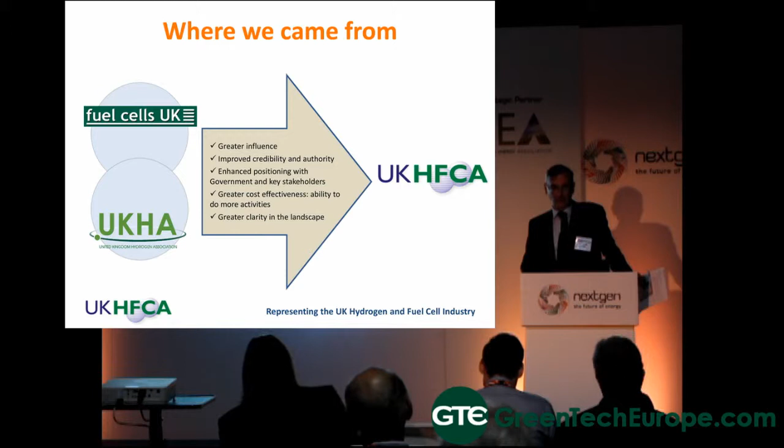There's been more promotion, like presentations at Portcullis House last year, and a number of ongoing events, giving greater clarity for the UK industry on where the vision was going for the business. The membership is made up of a cross-section of academics, gas suppliers, technology providers, and technology developers. Effectively, it's a who's who of the industry at the moment in the UK.

So the positioning really, the aim is to accelerate the commercialization of fuel cells and hydrogen energy in the UK.

The association provides an authoritative viewpoint, commenting on potential new legislation, energy market reform, and various other government initiatives, and provides a viewpoint on research development priorities while the market is still in a transition phase, for government and other funding agencies such as the Technology Strategy Board.

The areas covered are all fuel cell types and applications, covering the complete fuel cell chain from research through material science to integration and distribution. It also covers hydrogen production and storage, infrastructure, and other issues around the delivery, storage and use of associated fuels.

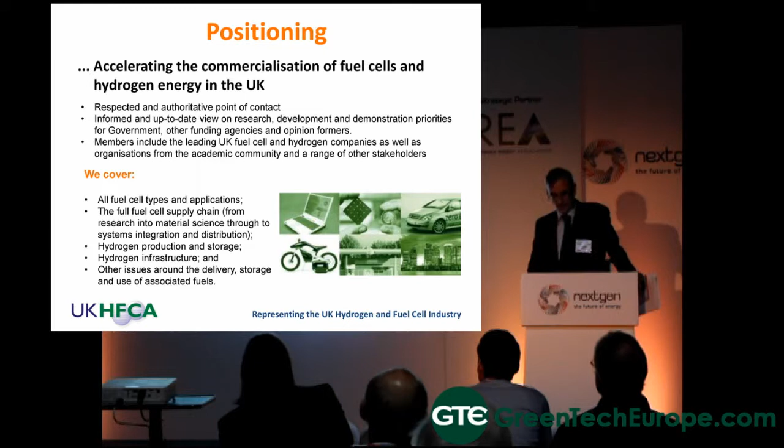So why fuel cells? Dan's given some of the background on where things are going, but in terms of fuel cells, they really provide a key opportunity to decarbonise a large range of applications. We've talked about power and heat applications, transport applications, and portable ones. Essentially, they're units which are safe, very efficient, and clean, with very little in terms of emissions. Reliability is now being demonstrated with long running times, and availability is increasing all the time, and they're becoming far more cost competitive.

So we're definitely in that transition where we've seen funded projects moving through to actually being commercially competitive. And they can operate on a range of fuels as well as hydrogen - there are cells working on natural gas, methanol, ethanol, methane and other gases.

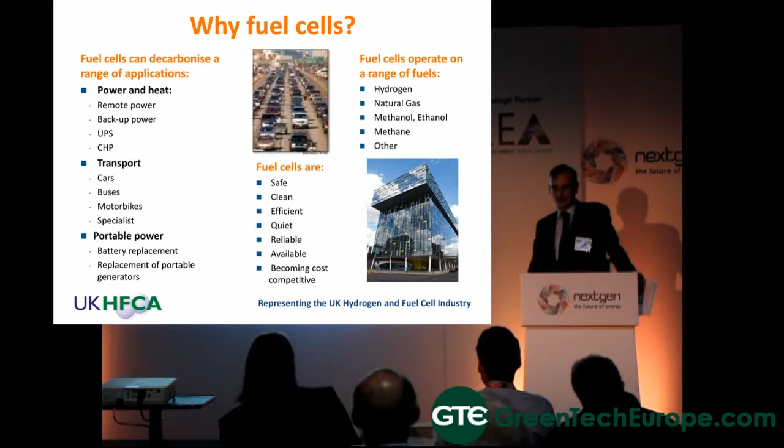So why do people look to use hydrogen? Hydrogen itself can offer a zero carbon footprint depending on the method of production. I'll talk a little about what the differences are, because people do talk about the source of hydrogen and its importance, and I'll show the impacts of where that can be. There's a variety of methods.

Currently the largest amounts of hydrogen are produced by steam methane reforming, mainly for diesel production, but there's a lot of clean electrolysis-based technologies, and we'll see more of that in some of the later presentations. Hydrogen can also be available as a byproduct stream - one of the production sources in the UK at the moment comes from a byproduct of chlorine production.

The product itself is safe to produce, store and transport. To give you an idea, Air Liquide operates a network of around 900 kilometres of pipework in Northern Europe, transporting hydrogen all the way from Rotterdam down to the French border, with systems built up over nearly 40 years with an exemplary safety track record. Something that's perhaps not really understood is how commonly it's applied in industry.

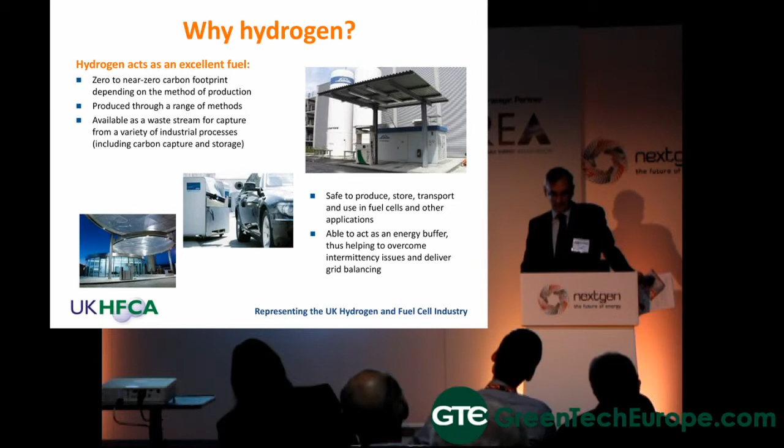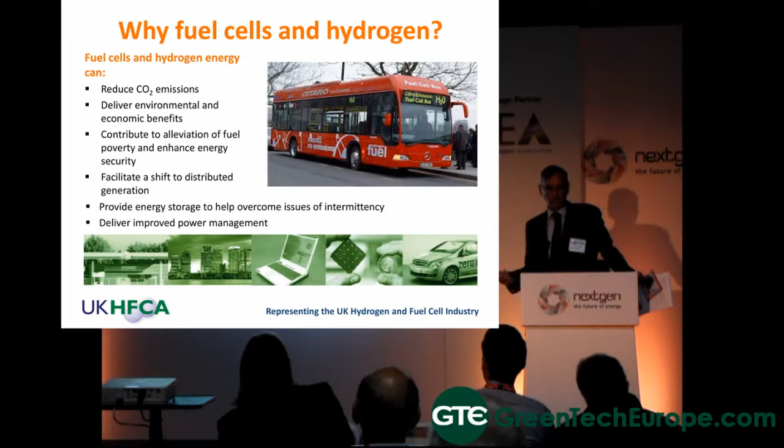Critically, as you'll see, particularly I think Graham will talk about, it provides an excellent energy buffer, an opportunity to overcome intermittency and deliver grid balancing. Combining hydrogen and fuel cells, you can reduce CO2 emissions. There are a number of benefits in terms of alleviation of fuel poverty and environmental benefits we've talked about.

Moving forward to some of the questions people ask, like where does the hydrogen come from. Even if we take hydrogen from existing industrial sources, which is just our starting point and not where we'd want to go - if you look at a petrol engine, you might see around 160-180 grams per kilometre in total from fuel production and vehicle emissions. For hydrogen from a fuel cell, there are zero emissions at the tailpipe, and if it came from a carbon source, there might be about 90 grams per kilometre. So already you're showing significant benefit from where you are now.

The vision is that those sources which currently use carbon would become decarbonised, and there will be other sources coming which have zero footprint. So essentially you start from an improved position, with the view to head in an ever-improving direction.

Same goes for mobile applications. If you use a genset working off petrol or diesel, you can emit around 37 tonnes per annum in CO2 emissions. You're at 2.8 if you use hydrogen from existing sources, and if you take it from improved sources, you will eliminate that altogether.

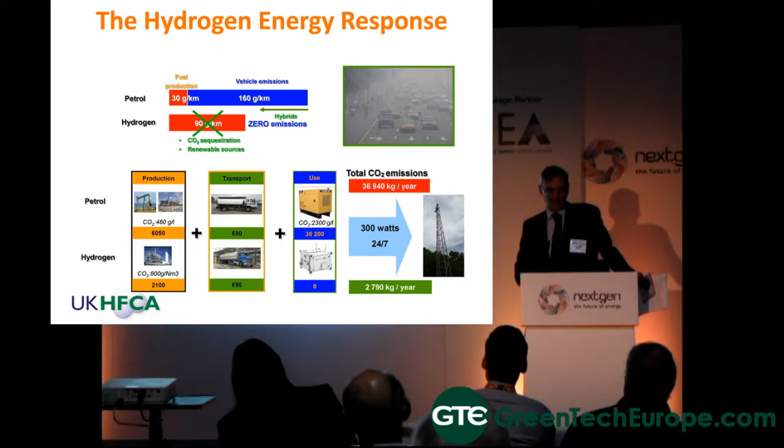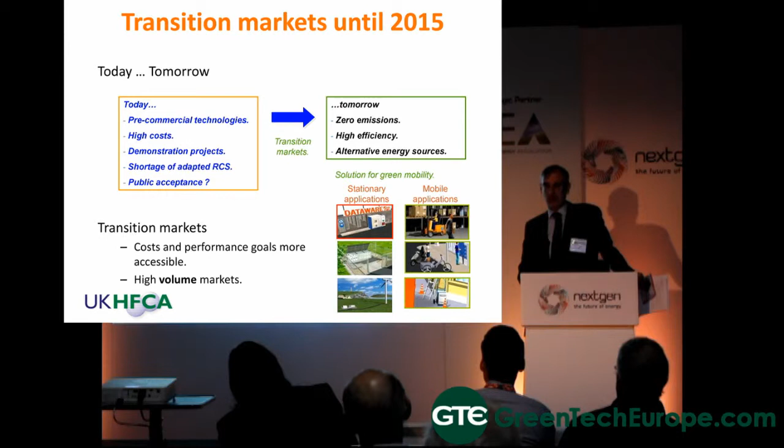We've gone from pre-commercial technologies that were high cost with demonstration projects, to production facilities becoming more fully loaded, and we're transiting to a situation where the economies of scale are improving. We're moving forward to applications being applied in the field now, offering zero emissions, high efficiency, and a real alternative with stationary applications such as data-aware backup, grid balancing potentially, mobile applications, forklift trucks, transport and road signage applications.

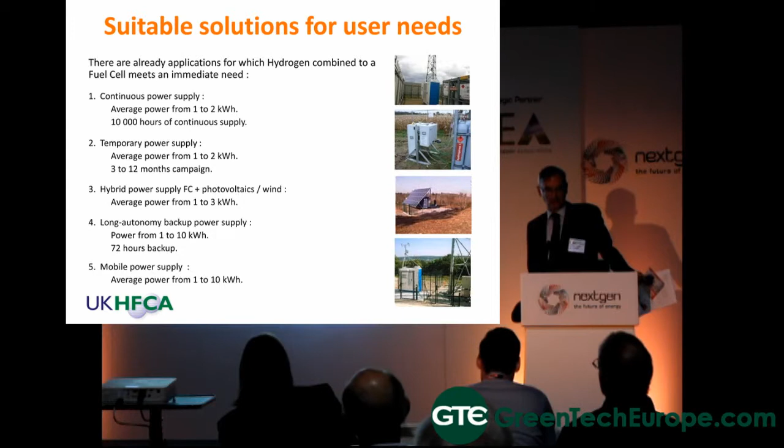These are areas where units are now running, operating on effectively a commercial basis, where you have continuous units from 1 to 2 kilowatts offering 10,000 hours of continuous supply, temporary power supply units from 1 to 2 on 3 to 12 month campaigns, hybrid applications with 1 to 3, and some long-term mobile ones in the 1 to 10 kilowatt area.

Clearly going forward there's a key opportunity to decarbonise transport. Fuel cell electric vehicles are a key part of the potential mix going forwards. As we've indicated, even with current fossil fuels there's a significant saving, and moving forwards that would move to zero emissions.

Talking about where we can go, we can look at electrolysis of water using electricity generated by wind, nuclear or other green technologies, biomass gasification technologies, and also capture and storage of carbon dioxide from existing steam methane reformers. Our company is proposing a project in Rotterdam which will capture the CO2 from a methane reformer and store it in the North Sea.

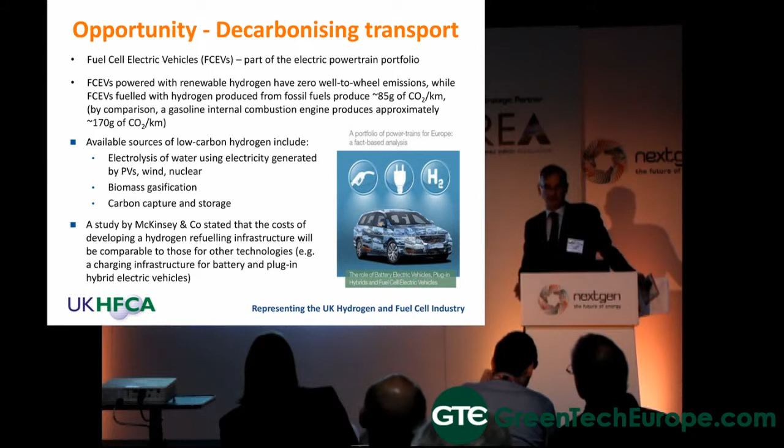Studies by McKinsey have stated that the cost of developing a hydrogen refuelling infrastructure will be comparable with other technologies. What's needed to move that forward is a vision, and that's where UK Hydrogen Mobility comes in. This has been launched by the Department of Business Innovation and Skills. It's a programme to bring together industry and government with a number of bodies, with investment to support and drive that forward - a cross-body drive to create a vision.

The aim is to create a template for how you ensure the vehicles, the fuel cell, and the refuelling infrastructure come together in a coherent format, or a form that's actually financeable. That project is moving forward with a number of partner companies, and further updates are expected late this year, early next year.

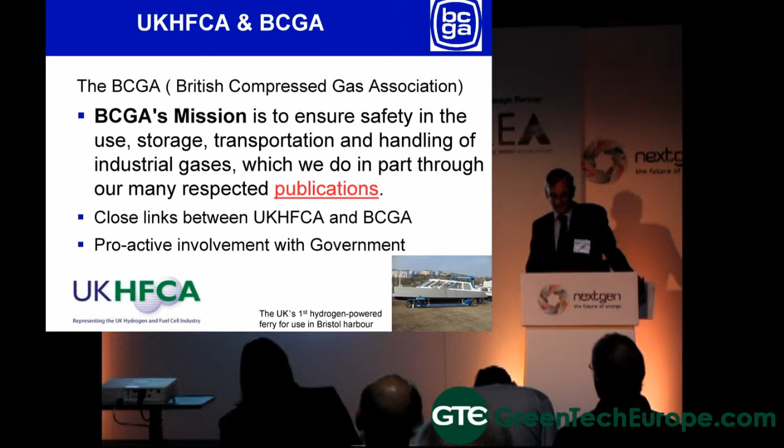Moving on to the question of standards, one of the areas where UK HFCA has developed forward is to develop an initiative with the BCGA, the British Compressed Gas Association, with a mission to ensure safety in the handling, use and transportation of industrial gases, which has a number of respected publications. There's close links between the two, but also proactive involvement with government, and BCGA itself has a number of codes of practice listed in terms of HSE references and UK government legislation.

The mission of the BCGA is safety. It was established in 1904 and has been operating as BCGA since '71, with about 73 members and growing, with some 70 publications. Essentially what it is, is a cross-industry view to actually provide safe standards. We talked about how hydrogen has been operated and used commonly with no incidents and safe operation - this is all about having a commonality of view.

BCGA earlier this year, based on the cooperation with UK HFCA, formed a partnership with a number of bodies looking at what we're calling TSC9, a technical subcommittee. The focus is on hydrogen in particular, but also looking at other gaseous fuels. There's involvement with BSI standards to take the BSI standards and look at where they are, and there's been particular discussion with HSE in terms of the appropriateness of design of infrastructure for gaseous refuelling and filling stations.

Take the example that if you put a fueling station into a local council area, at the moment you've got the issue for the people putting the facilities in. There are a number of international standards, but there's no clear code of practice to walk you through how to do it. If you're the planning officer and you've not seen one of these things before, there's no clear guidance on how to do it. So you run into a situation where there are actual barriers to implementation, and clearly what we want to do is ensure that things are done consistently in a format.

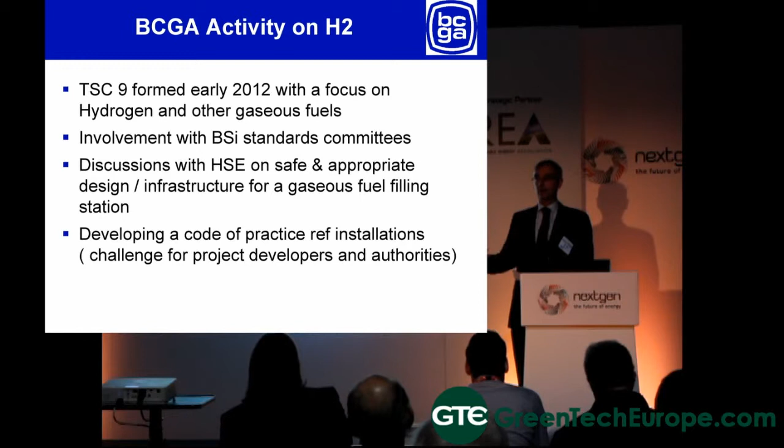So the whole purpose of what's being developed, and acknowledged by HSE as a requirement and by planners, is a code of practice for installation, so that when you do your fuel cell installation there's a step-by-step view that everyone can see - what should be covered, how it should be approached, how the planning can be undertaken, and how the installation can be put in place safely with appropriate separation distances into the right kind of environment.

That process is ongoing, and the first drafts are being developed now, and we expect something due for publication early next year, which actually puts us ahead of a number of other countries. I was talking with colleagues in France about forklift truck installations recently, and they've got the same challenges across Europe - they're seeing issues associated with putting these types of installation in and how to move that forward. The same goes with standards in terms of the purity of hydrogen required.

So in summary, we can see that hydrogen installations are transitioning now from demonstration projects to economic and repeated business. There's a large number of companies now that are loading, actually putting the technology forward into the marketplace. Moving forward to 2015 and beyond, we need a clear understanding of how this should be installed, interfaced with the environment, moving more and more from industrial environments to actually public spaces as well.

And those codes of practice have been developed by the industrial professionals within the UK HFCA, across the BCGA, across the companies you can see presenting to you, who are taking a very serious view in terms of providing reliable technology, but also economic technology and safe technology. Okay, thank you very much.